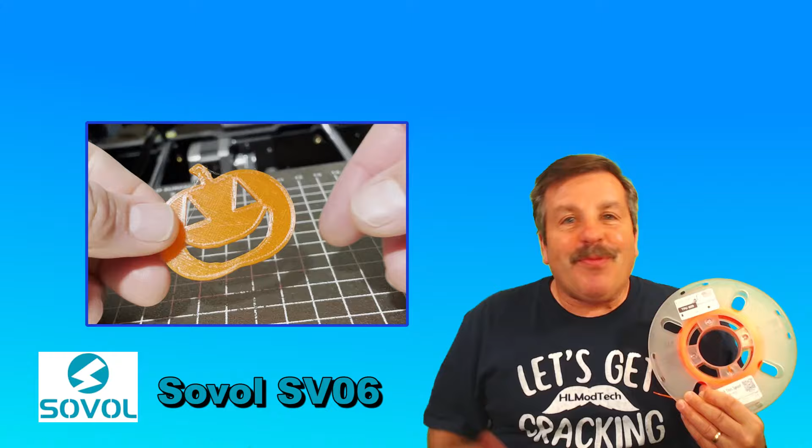Friends, for the first time today, I'm going to try printing with TPU. It is from Polymaker Filament, and we're going to use it on the Sovol SV06.

So let's get cracking. For today's fun print, friends, we're going to cheat, and we're going to make a keychain out of my cake pop tutorial.

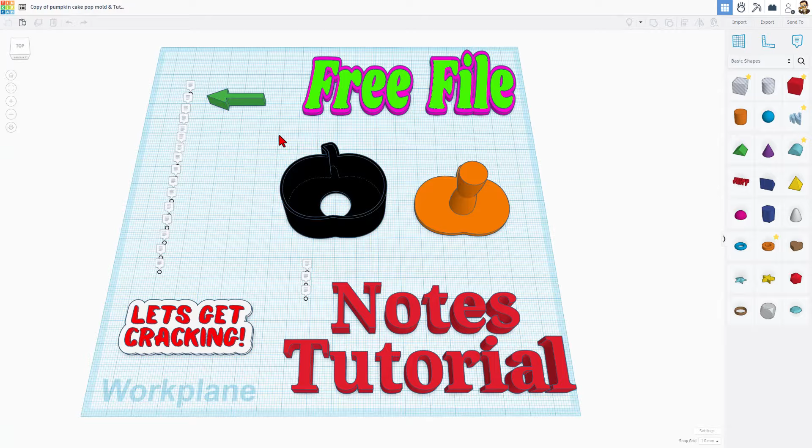I do not want to wreck the tutorial, so I'm going to click on the gear and duplicate it. Let you know this is a totally free project. If you want to find this, there will be a link in the description.

You can see here these parts are grouped. Right now I'm going to ungroup them, and I'm going to move them into separate pieces. This was an SVG file.

I'll just let you see real quick, if you switch the modes, if we go outline, it does a hollow shape. There's all kinds of things you can do. Because this was an imported SVG, I'm going to simply do Control-Z to undo it.

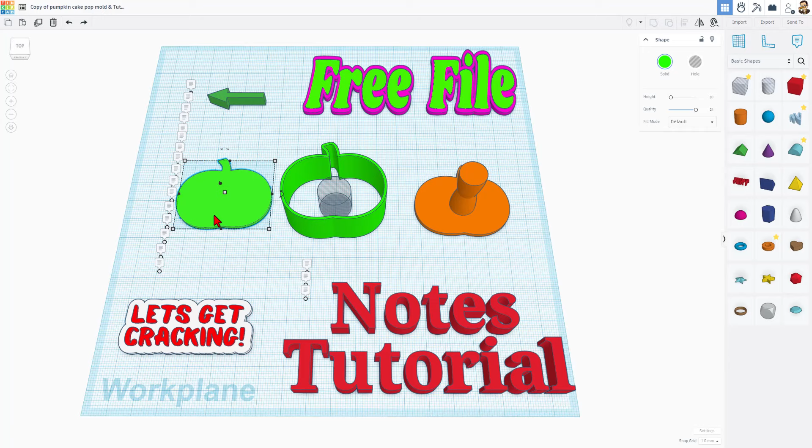And I'm going to turn it into a keychain. We're going to print it with that orange, and because this is TPU, it'll be flexible. So the first thing I'm going to do, just to make this look a little bit cooler, let's make it orange. I'm going to switch from custom to presets.

You can bounce back and forth between those. Check the measurements, this is going to be about 45 by 30. I am using shift stretch, so it scales the same amount in every direction. I'm going to change the height to 2 millimeters thick.

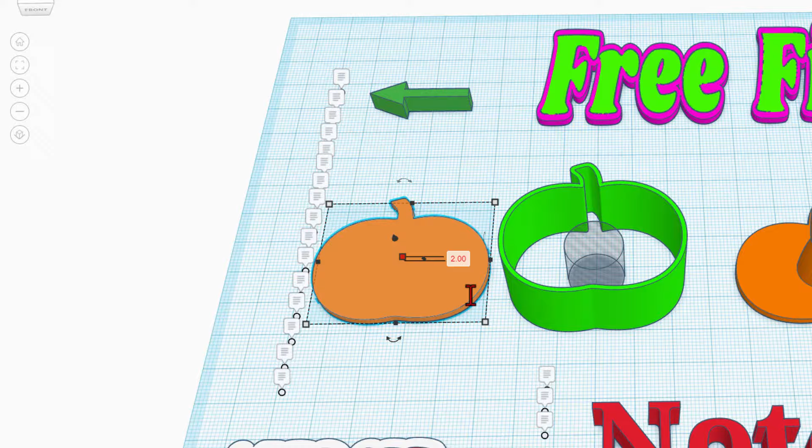All right, so let's decorate our keychain. I'm going to do this real easy and fast because I want to try out the TPU. Of course, I will put a tutorial in the corner that shows you how to make epic pumpkins.

We're going to simply bring out this wedge for eyeballs, switch it to a hole, look at it from a corner. I'm also going to go back to perspective view because I like that for normal building.

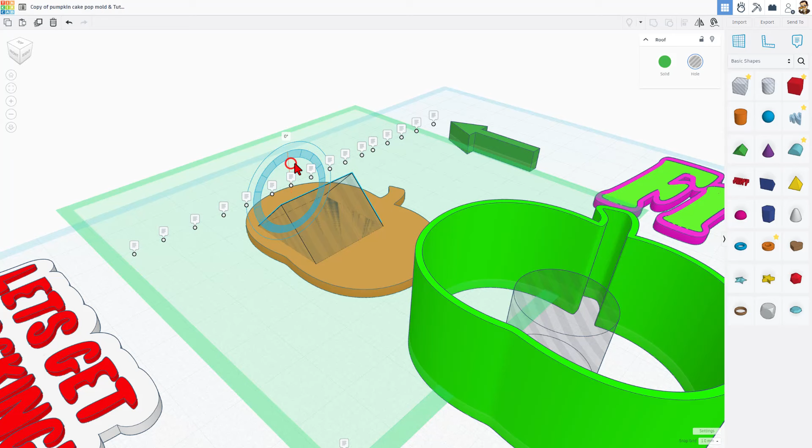And when I stand this up, notice inside that blue circle is 22.5 degrees, outside is 1 degree, and then finally if you hold down shift, it goes 45 degrees at a time. That makes my pumpkin's eye look pretty cool.

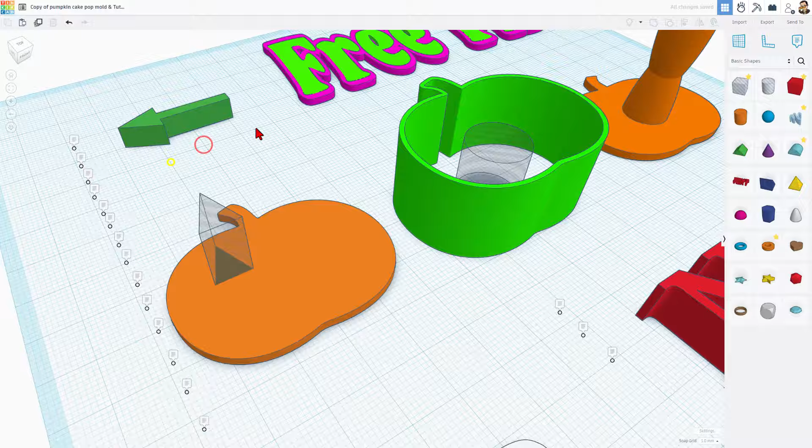I can just use the black handle to squeeze it to the exact size that I want. I also like that because it will be a good keychain hole. I do need to hit D to drop to make sure it's down to the bottom.

And then we can do Control D to make a second one, shift nudge, and nudge to make it exactly where you want. And now we're going to make a real easy mouth.

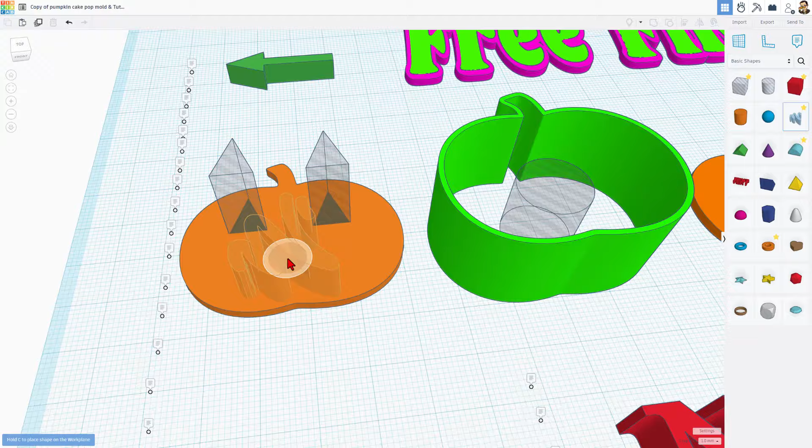Friends, we're going to do that with scribble. Once again, cruise it on top. I'm going to give mine a smiley mouth. You can give yours whatever sort of mouth you want.

You can see up here in the preview window what that would look like. I'm going to do a hole and cut it out, so I do want this to be filled in. So I would do this, but watch, I can just hit clear, and we're going to build instead of with the marker, with the shape tool.

So check it out, stretch, go below, and bingo, in one step we've got a funny little smile. If you want to trim it a little, you can use the eraser. Of course, if you don't like what you did, you can always just start over by hitting clear and going back to your shape tool or your erase tool.

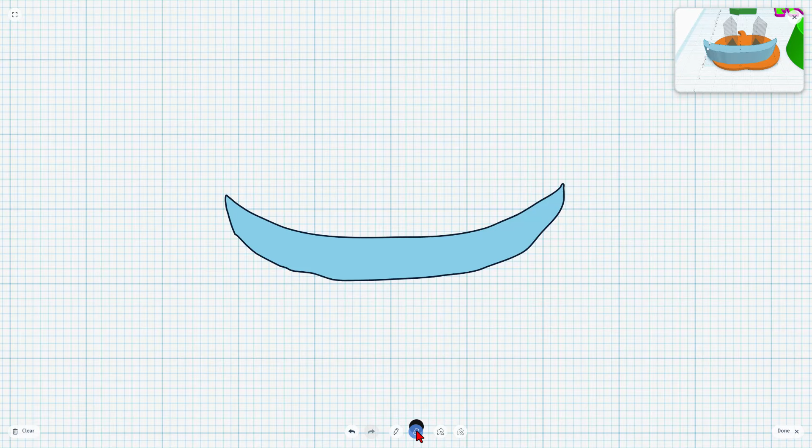I'm going to call this fine for my project. I'm going to hit done. There is the awesome mouth.

We can squeeze it down to the exact size we want, make it a hole. Don't forget D to drop, so that way it's on the work plane. And now we'd be ready to group, but I'm going to make this a little cooler.

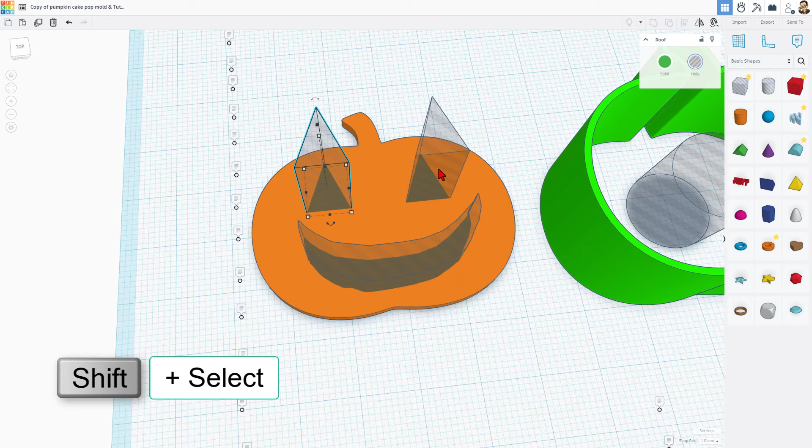I'm going to do Shift Select to grab those two holes and group them with Control G. Now when I select all those items and do L for align, we can click on the pumpkin and make sure the eyes are in the middle. Select them all and Control G to group.

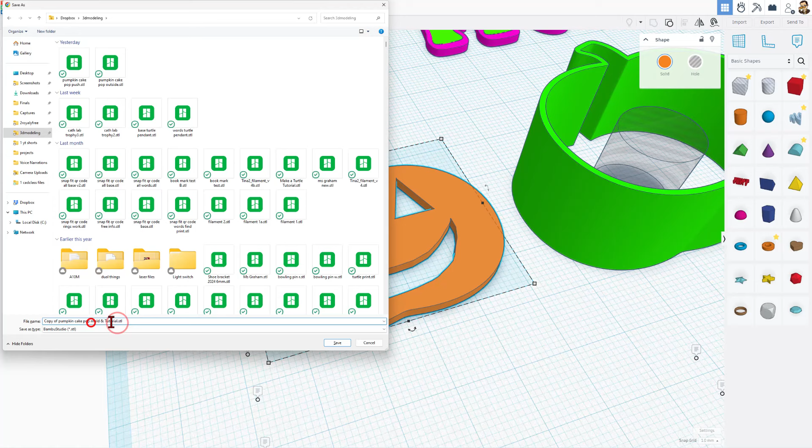Bingo, we've got a fun little pumpkin keychain, and now we're ready to send it to the printer. Of course, step one is to export as an STL. I'm going to save mine in my 3D modeling folder, and this is going to be called Pumpkin Keychain, but I'll do KC for short.

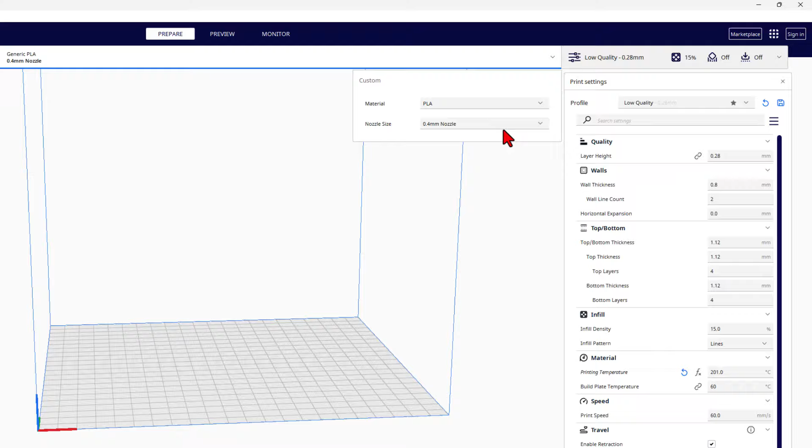I do all of my slicing for this printer using Cura. Here is Ultimaker Cura 5.8. Let's switch printers, of course we want the Sovol SV06. We are also going to switch from PLA to TPU. I'm going to use generic because I do not have Polymaker Filament in the list. I am working with a 0.4 millimeter nozzle.

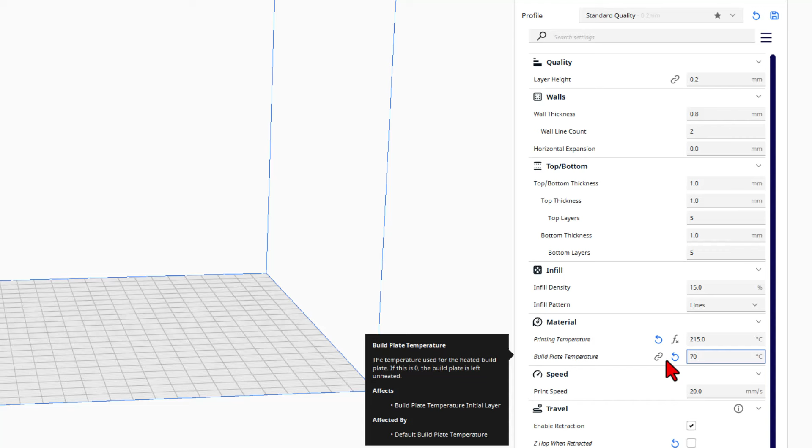I am going to adjust these temperatures over here. It listed 210, I'm going to just go with 215, and the build plate temperature was set at 70. I'm going to keep my layer height at 0.2, walls of 0.8, top and bottom of 1. I'm not going to use any build plate adhesion, and let's plug in my SD card. There are the files that are already on it. Do notice that the print speed for TPU is quite a bit slower.

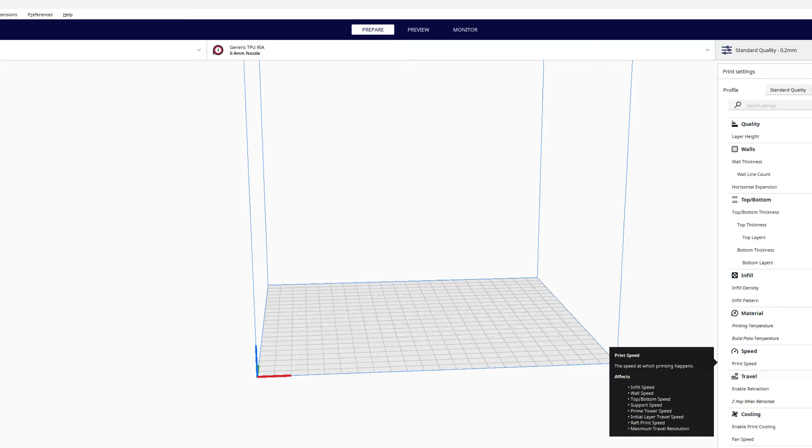With that all set up, let's grab our design. Of course, since I just did it, it is at the top of the list. There is our fun little pumpkin, and we can simply save it to the removable disc and eject it so we can take it to the 3D printer and get it printed.

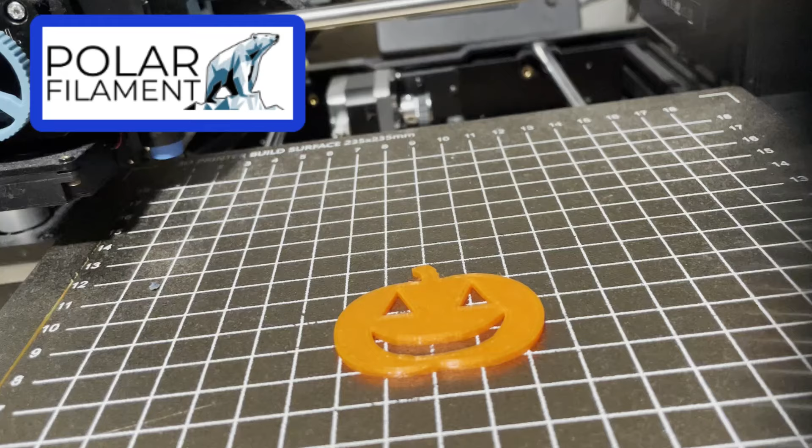And after an hour, friends, we have got a pumpkin keychain.

And because it is TPU, it's bendable. Oh my gosh, that is so awesome.